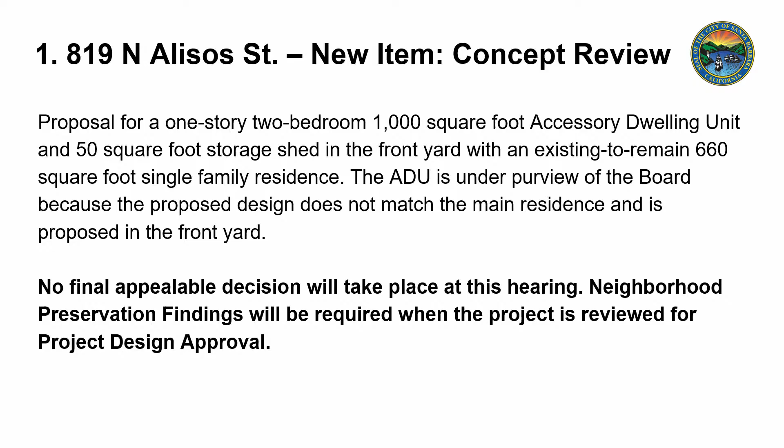Our first item is a new item for concept review, 819 North Alisos Street. Proposal for a one-story, two-bedroom, 1,000 square foot ADU and a 50 square foot storage shed in the front yard, with an existing 660 square foot single-family residence to remain. The ADU is under purview of the board because the proposed design does not match the main residence and is proposed in the front yard. No final appealable decision today, so welcome.

Do we have any staff comments? Yes, just one. This project has gone through one round of review through its application completeness cycle. There are some corrections and design changes needed for the project to demonstrate compliance with some of the zoning ordinances, but generally the style or massing doesn't need to be altered too much. So staff thought it best to have it come here for conceptual review, even though it's not deemed complete yet. Any comments on the style or location of the massing would be really helpful - just general, broad comments - so that when they return, hopefully they can be granted project design approval. Thank you. You'll have 15 minutes to present. Great, thank you.

I'm Alex Wyndham, architect on the project, and thanks for reviewing this. So I'll just give you a rundown of the project first.

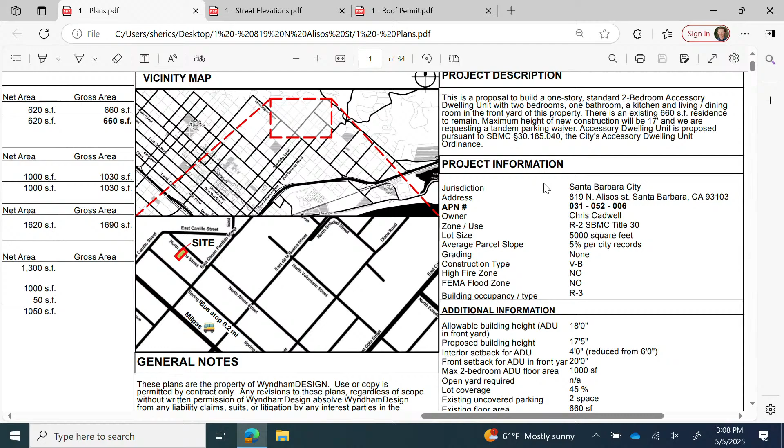And we have the way the lot is, there's a large front yard. The existing house is 660 square feet, and it's set all the way at the back of the property.

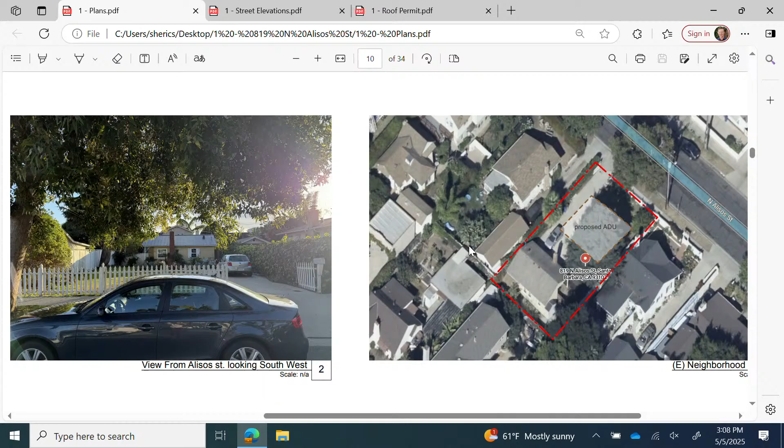The existing house is plaster, probably built in the 40s, 50s or so. It's got a standing seam metal roof, which the owner put on a little bit earlier. So that's the existing site.

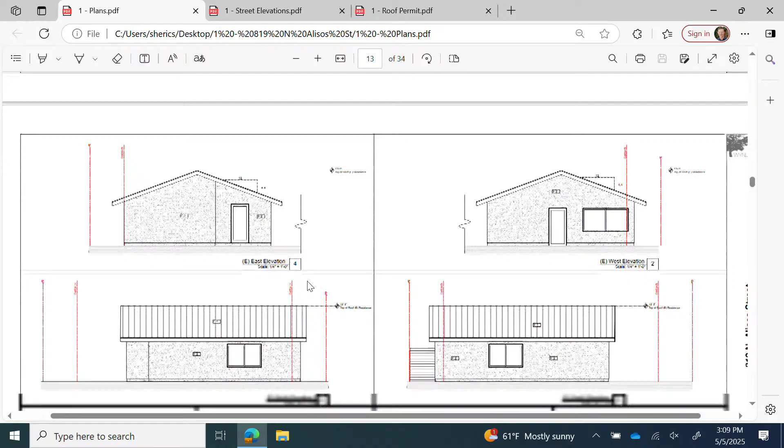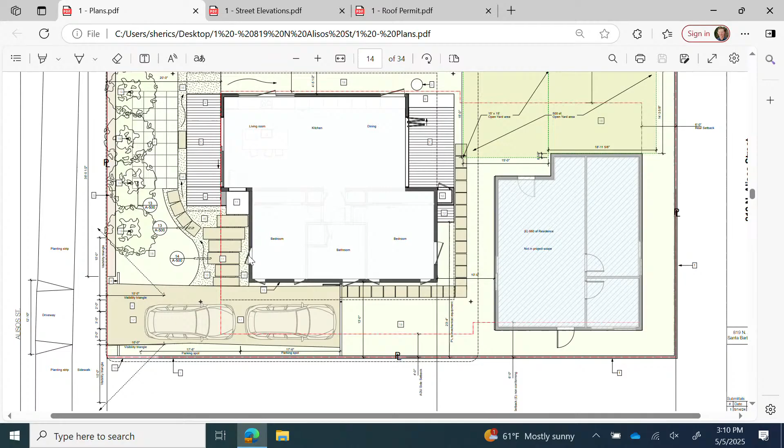So that's a site plan. And here's our floor plan. These ADUs are so small, so...

The main living area we combined it all together. So the living, dining, and kitchen area is one big room with a raised ceiling and doors on each end, so it opens out to the outside. Even though it's a small space, it really connects to the outdoors and lets the owners use the back porch and the front porch as part of the living area.

And then the lower part of the building is over here, which has the bedrooms and the bathroom, and a little storage spine down the middle.

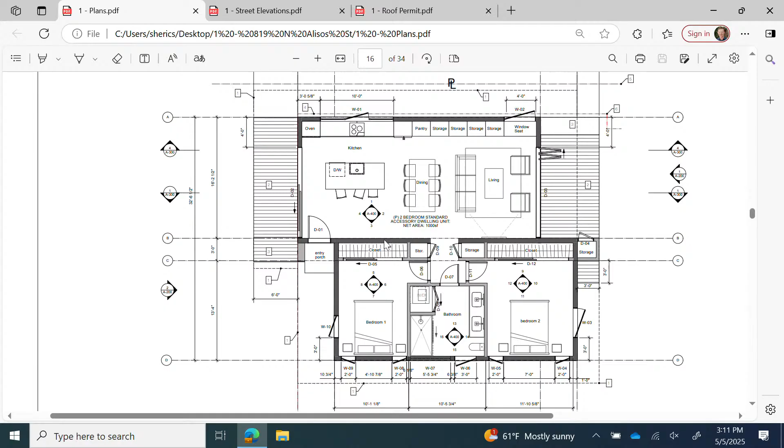So the taller portion is going to be a plaster, like a smooth plaster in a light color. The lower portion, we're proposing to do a shiplapped cedar siding, with a standing seam metal roof as well, and metal-clad wood windows.

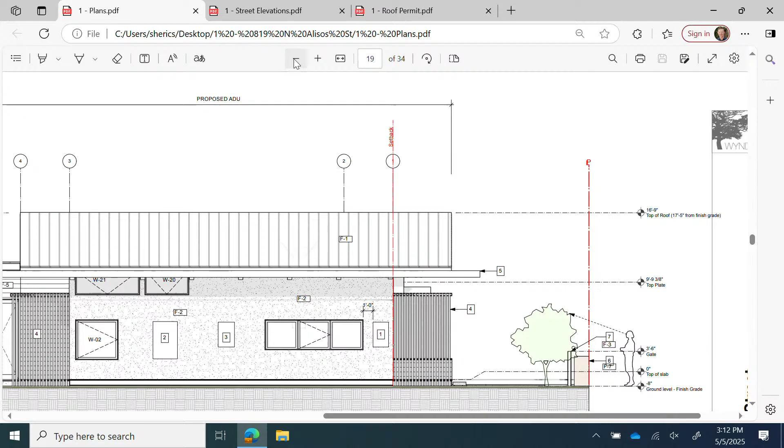So there are my elevations. This is a little bit of a comparison between the two. The existing is on the right and the proposed on the left, with a couple of renderings at the bottom.

And then we have the exterior cedar, which we're looking to do as a shou sugi ban, the charred cedar.

For the front yard, we're looking to do a dry stack Santa Barbara sandstone wall with sandstone pavers and native plantings and the rain garden as well. There's some exterior lighting, which will be dark sky safe, downward facing, and no glare.

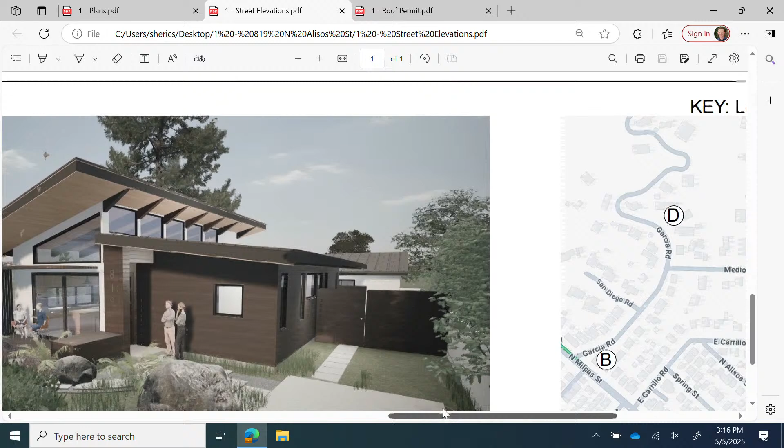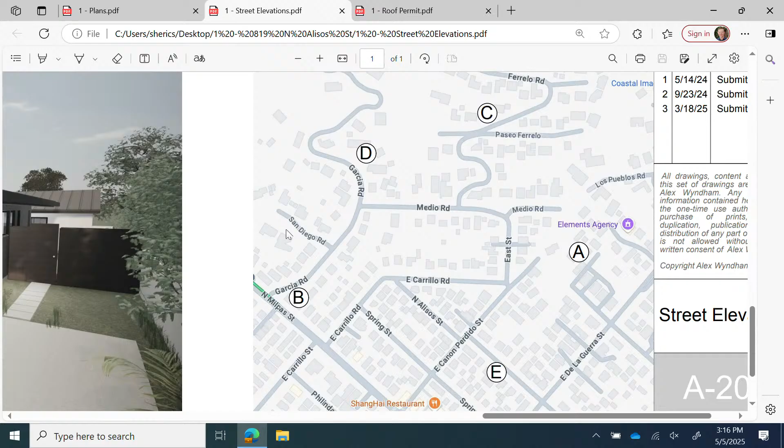I also drove around and looked at other buildings of a similar style to what we're proposing. So E here is 819 Alisos, the project site, and then A, B, C, and D are around here—they're all pretty close, within a few blocks, a couple blocks.

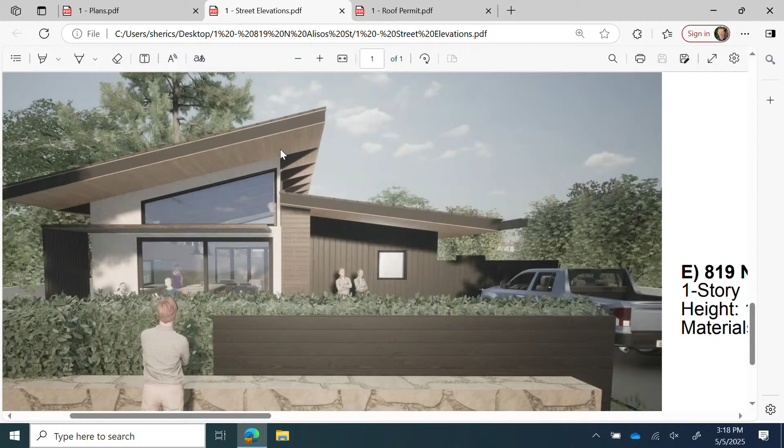So what we're proposing is the larger space has the plaster, the shorter side has the wood cladding. We've got larger eaves to provide shading and give some character to the building. They're a little too long—one of the comments was we need to make them a bit shorter. But that's about where we are right now in the design, so I'd love to get comments about bulk, scale, and style.

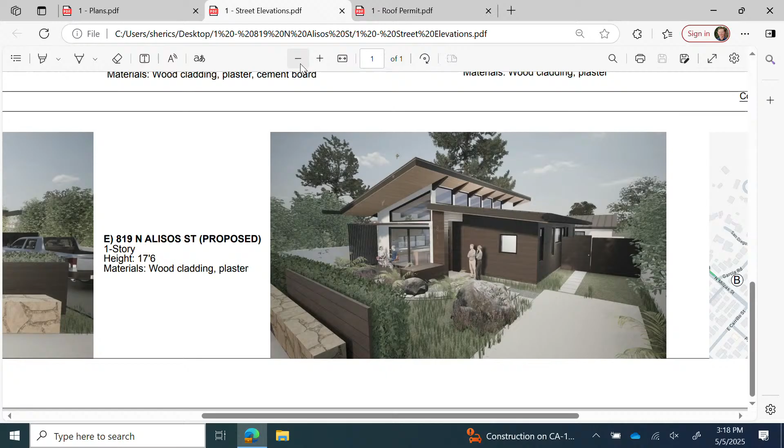Perfect. We'll move to public comment then.

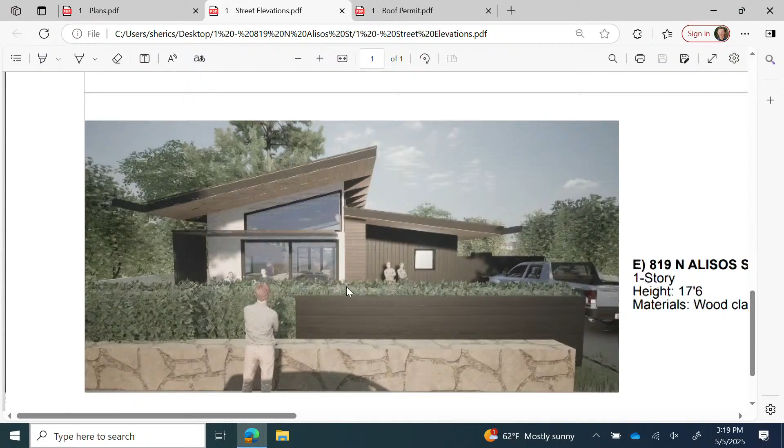On the render we're looking at, all the wood claddings are horizontal, but on the elevations some are vertical, some are horizontal—just wanted to clarify which is the end result. So some are vertical and some are horizontal, and you can see the thought behind that in this rendering. Okay, I was looking at the cover sheet render. In this one, there's the spine that runs through the middle, and that one has horizontal cladding, while the bedrooms and the bathroom are vertical. Thank you.

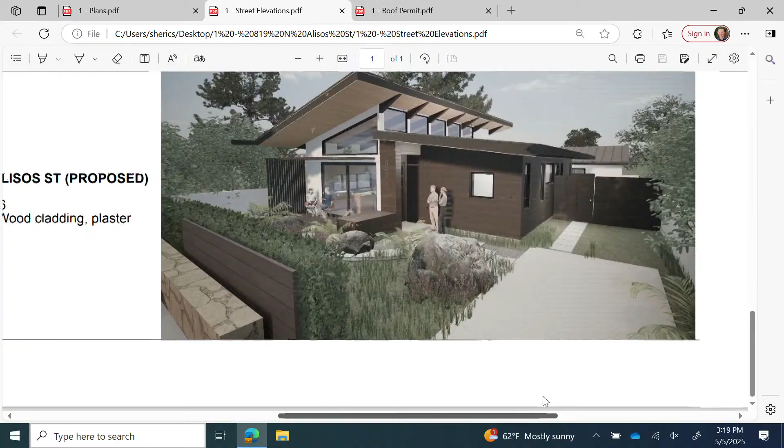You can see it a bit more in this rendering. Okay, can you show us on the site plan? There's the existing tree, I believe it's a 24-inch diameter. It will be on one side, I'm not sure if it's east or west, close to the proposed building.

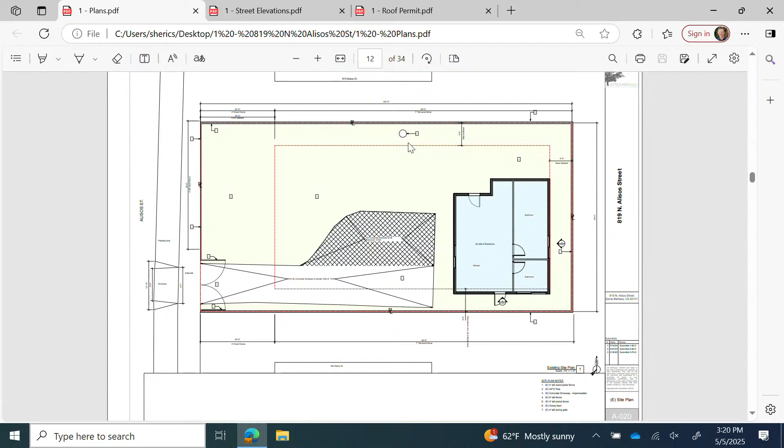I think you have this one, keynoted as number 2, that round one here. Yes, so that's an existing tree. I'm not sure of the species, maybe a type of cypress. And right now we're proposing to remove it.

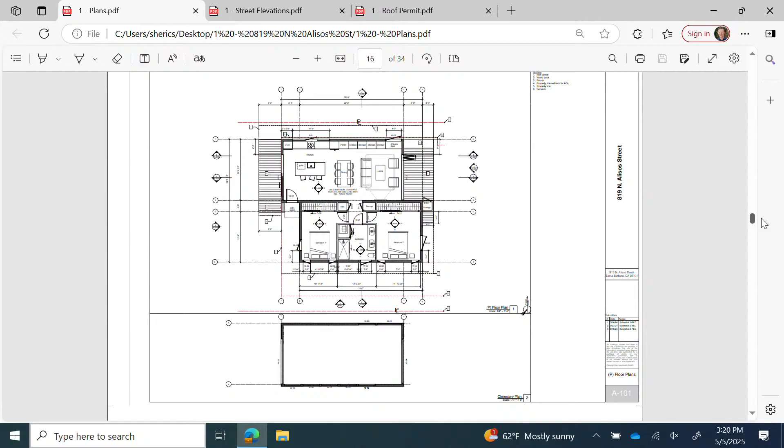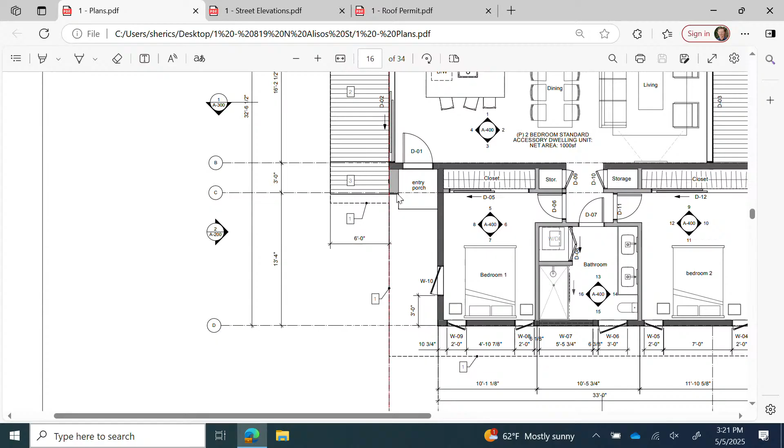Yeah, so that is actually, which we're going to remove. That was right here, there was a little shed, kind of protruded out, and it was a storage area. So we've pulled that back, and we don't have that anymore. Got it, thank you.

And just to confirm, your intent is to paint the existing residence the same stucco color as the proposed ADU. Yeah, exactly. And can you go over, I know it's a shade of white, have you thought about what color? We haven't gotten the exact color yet, but it would be a light, lightish white.

And then last thing, I saw in the rendering, can you speak to it looks like there's part of a fence or wall behind the sandstone wall with horizontal woods. Yeah, so in this proposal we had a sliding gate that would slide across the driveway. I think we're going to remove that because it's right on the sidewalk, so we'll probably just not have a gate there.

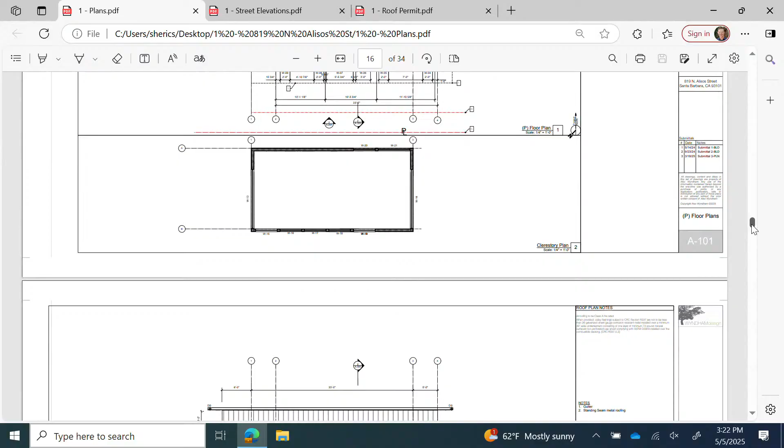Okay, that's it for me. Thanks. Any other questions? One question is the height again, the plate height on the lower level, because it looked like you were drawing your plate height lower than the wall, maybe. If you could just zoom in on the elevation that has the plate heights on it. The south elevation might be good.

So I've got a 9-foot plate on the lower side here. And then there was another drawing, maybe it was the south elevation drawing, that was throwing me off. Let's see the other long elevations. Oh, the long elevations, yeah, let's see this one.

Is this the one you're looking at? Because the plate height looked lower. Yeah, you might be right there. Let's see, where is that connecting? You see what I mean, because they're slightly different between your left and right side, they have different plate heights. This one I think may need to be a little bit higher.

I think you're correct, that was what was throwing me off, where your cursor is. So is that correct, you're going to raise it up to above 9.3, 9? Yes, so the lower level plate is actually going to be at, let's see, what's that number?

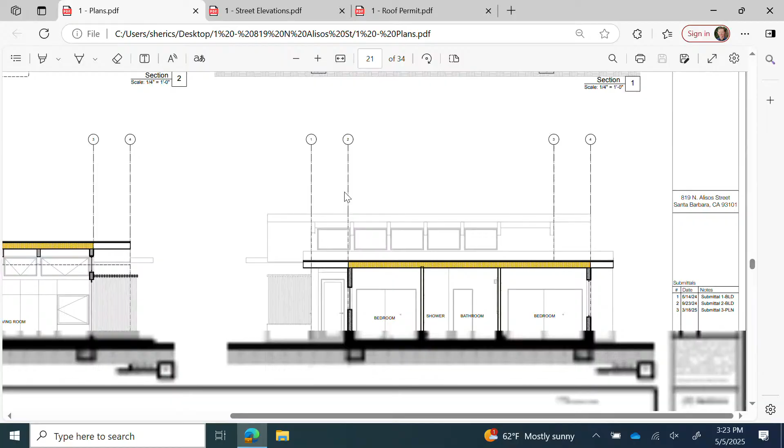So on this section you might be able to see it a little better. On the wood side it'll be 9, and then on the plaster side, like this. So in the section you can see, I actually have it here. Yeah, so that elevation is incorrect on that other drawing. That's what I thought. It should be 11, 11 and a half on the north.

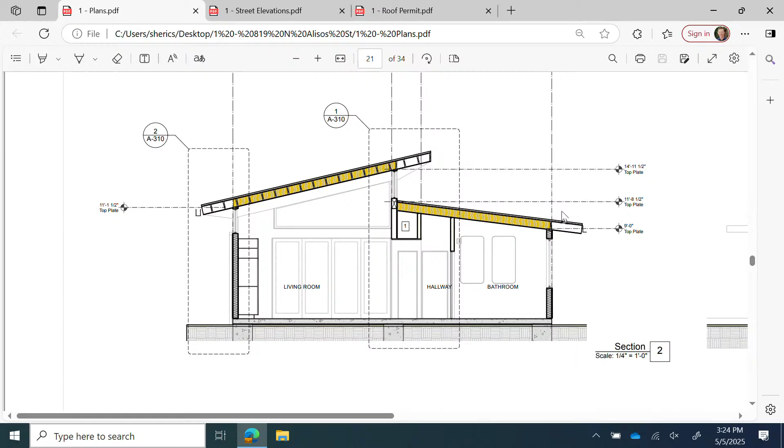I'm kind of calling the street west, but you're saying the street is not west. The street is kind of northish, northeastish. So if I'm looking at this elevation and that's the street, what elevation are you calling it? That is east. So okay, the north elevation you're showing 9, but if you go to the actual north elevation, let's see, let's go there.

Here's our north, that's our south. I think the site plan shows the north arrow different than the elevation. I'm just trying to look at the driveway elevation, because that's the elevation that I think you said had a 9-foot plate, and then the other side, across from the driveway, had an 11-foot plate or so. But the driveway elevation, what's that plate height?

So this is the view if you're standing on the sidewalk looking at the building. This says it's got a 9-foot plate on the right-hand side, by the driveway. So can we go to that elevation, which would be the east elevation? Yes. So if we're going here, that is this elevation here on the bottom.

I'm having a hard time understanding this. I think the labels are wrong, correct? Yes. So on this elevation, it should be about 9 feet. That should be 9 feet. Is that it, or is that another drawing? It doesn't say elevation on that drawing. It says the west elevation. Oh, there it is. So that's supposed to be 9. Yep, so this is 9 feet.

Then you were not asking for a minor zoning exception for the height of the hedge at the front. You're going to keep it at 42? Yeah, we're going to keep it at 42. You don't want to make it higher, for more privacy? No. Okay, no more questions.

Board Member Richards: Is there any landscaping proposed in the front yard? Yeah, so we're proposing to do some manzanita trees in the front, and then doing the rain garden. We don't have a landscape plan yet, but that's the idea of what we're looking for.

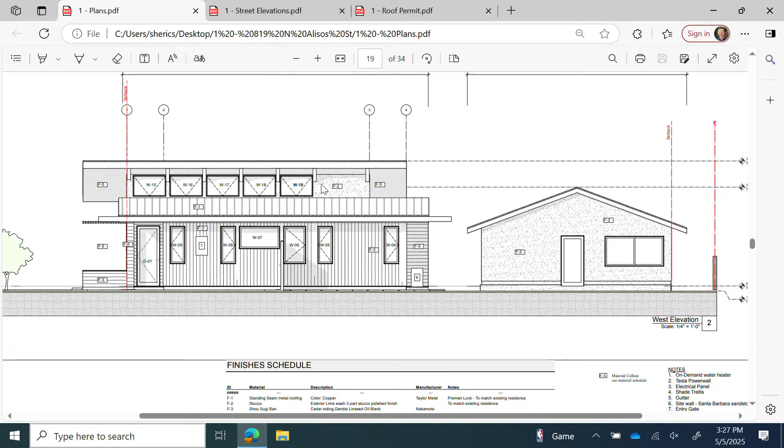I guess the other question I had is, what's the rhythm kind of based on for these exposed beams? Because it seems like it changes partway through. It does change partway through, and it's partly to have a consistent length to fit in the site and get our square footages right. It is basically to keep our window widths consistent across here, and then this ends up being a shear wall there. So we wanted to keep the window widths the same, and where the shear wall is, that had to be a little bit wider, so we're able to have the beams a little bit further apart.

And then, what's the plaster texture finish for the existing main residence? Yeah, so we're thinking of doing a smooth finish to match.

And then my last question is, if we go to the opposite elevation, the east elevation, the head height for these low windows, what is that? Right now those are at... I think it's 6 feet at the top. And right opposite those, on the property line, there's a plaster wall that's 7.5 feet tall or so between us and the neighbor, so those would all be looking out right onto that wall.

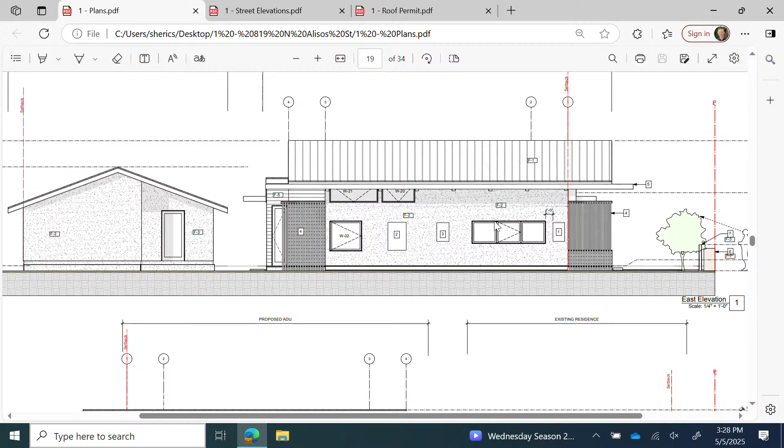I think that's all my questions. Okay, all right. You had mentioned potentially adjusting the overhang at the front yard.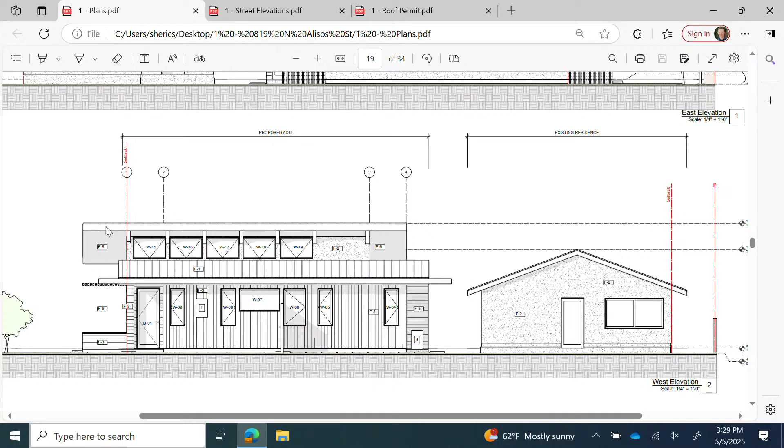So what is it right now, and what are you thinking about adjusting it to? Right now it's a 5-foot overhang here, and we're thinking of pulling it back. I think they're saying to bring it down to 2 or 3 feet max. So it would come to about there instead, because it's over the setback line. So that's about what you have as it wraps around? It is. That would be 3 feet all the way around.

Okay, we'll move to comments.

I actually have one more question. I'm just looking at the street view with that cypress tree you mentioned. Are you planning on replacing it, or thinking about other types of vegetation or screening along that fence line? Looking from the street, it's like a very mature buffer between the properties. It is, yeah, it's a large tree. At the moment we're not planning to - the owner's kind of worried about fire danger and the tree falling on the house.

But yeah, we'd be open to suggestions. It's interesting because it's quite high. I don't know how much it actually would screen, the foliage is so... I'm not even thinking for screening, I'm just thinking once that's gone, what other mature planting is there, kind of how it's aesthetically affecting that street, and looking around in the areas where you don't have it.

I mean, I understand why you'd want to remove it, but just... Is that palm tree on your property or your neighbor's? The one on the right side, opposite - is it on the property? Oh, it's showing up on our Google but not in the photo, so maybe it's already gone.

Yeah, and I think that was all my comments. There is one other thing on the side elevation—I saw that on the west and east there are water heaters and a Tesla charger. I know you don't have a landscape plan already, but do you think you'll have enough space to propose a little bit of screening? I know on the right side of the image we have hedges from the neighbor, but on the other side we don't.

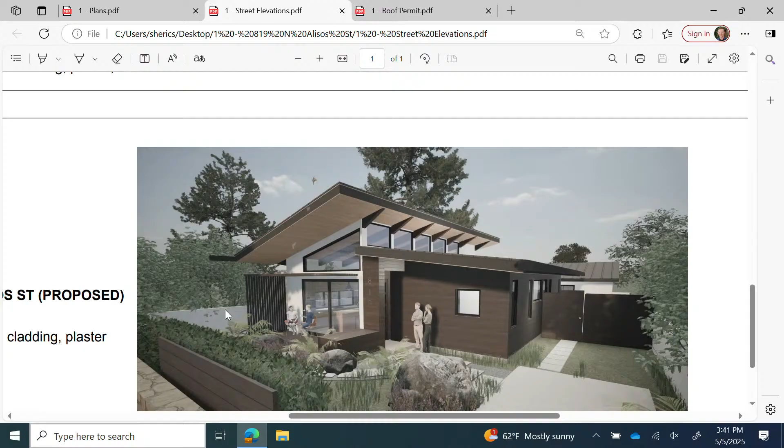On this side, you mean? Yes, on the back. Is there any way we can screen that? Yeah, so as you go along there, right about here on the drawing, it goes to a 7.5-foot wall, and that goes all the way to the back of the property. So as far as screening, it's very well screened. So when you're standing there, you don't see the neighbor's windows? No. I think that's all my comments.

I think it's a really nice project, and it will be a really nice improvement in the neighborhood, and we're excited to see it. Great, thank you. Board Member Richards?

Sure, yeah, I can appreciate the reduction of that front overhang. I think it's going to help bring down the scale of the house so it doesn't feel as looming from the street. I do think having some screening there is going to be important, because it's a straight-shot house with a big picture window to the street, so your clients are going to want some privacy from people walking by. I'd also encourage you to study making the spacing for all of those beams a consistent depth—I think it'll help the space feel uniform and not like there's a weird gap at the end. Yeah, but I think it's a very attractive project and I'm looking forward to seeing it.

Great, thank you. So from the board, do we think this project could go? Sorry, I just wanted to jump in—I know there were some questions about the tree replacement standards from some of the board members. I'm hearing it come up about three times, so I wanted to remind you about the design guidelines and meeting procedures in the yellow book, section 3, for tree and vegetation preservation. There are some standards for replacement that the board can use.

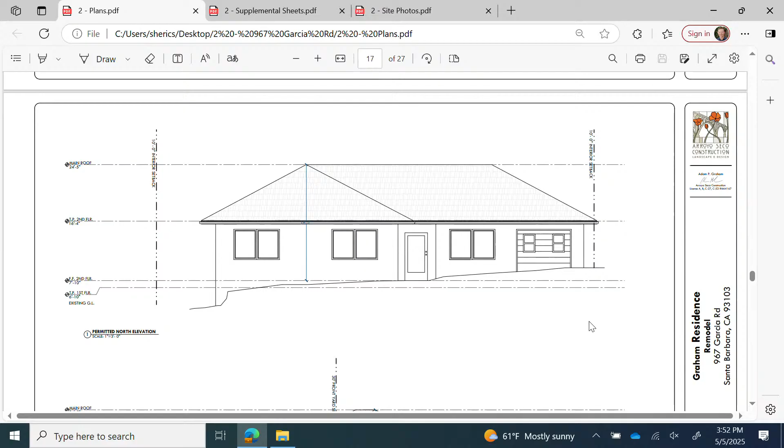Most of the house, as it currently sits, is in its original 1946 state of construction. In-wall electrical, plumbing, and waste lines are all original. The heater is in the original sump, a gravity heater in the middle of the house. So at this point in time, it is far overdue for some upgrading.

The garage was converted the year following the original construction. So if you look at the floor plan, there's a sort of an in-law bedroom and ensuite. At the moment, the garage is basically unusable unless you have a very short and narrow vehicle.

There was a minor remodel addition in 1972, which added the terrace to the back of the living room. There is a dubiously permitted room underneath the terrace, and they did a minor kitchen remodel. That's it for the permit history on the home.

There is an apartment under the house that is a mix of original fixtures, electrical, plumbing, and so on. The bathroom is original, and it was brought in to be doubled in size when the upstairs terrace was permitted. Our intent is to convert that existing space into a special ADU.

You can see the finished stand-up basement storage. That is all unconditioned space, and I would like to capture that within the foundation and add conditioned space in the center section for a wine cellar, storage, whatever.

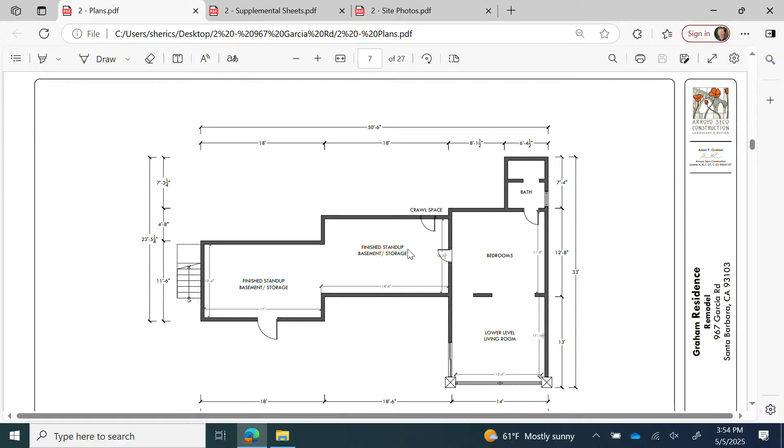The intent is to basically use the existing footprint and in fact reduce it in size on the west elevation, because we need a driveway to get to a garage, since as it is, the existing garage is not code compliant. Personally I don't care about having a garage or not, but since it needs to be code compliant, we're proposing putting the garage towards the bottom of the property with a pool cabana.

Not a spectacular architectural piece of work in that garage. I'm looking at 8-foot plates and probably a flat roof. My original design concept was a green roof, but because of fire zoning, we can't do green roofs on any of the additions, which is unfortunate. Anyway, there's nothing spectacular about the height of those lower buildings—it's just to get the garage in a permitted state.

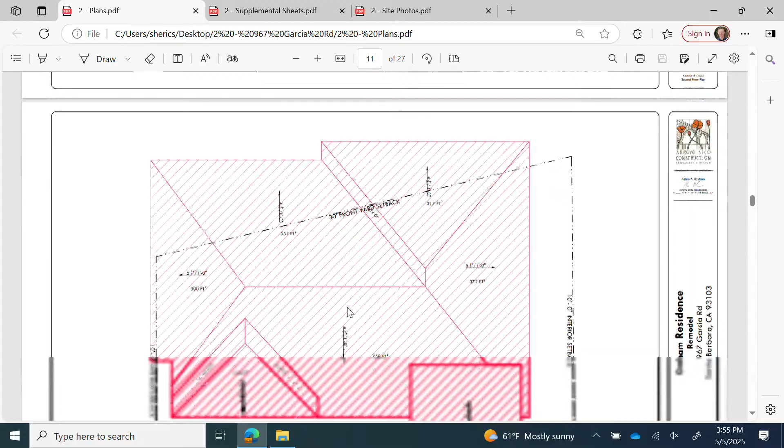We are proposing a fairly major remodel with an addition of a breakfast nook off of the kitchen. There are some nice views at that part of the house, giving a little bit of privacy to that balcony or outdoor terrace off the back of the kitchen.

We'd like to do the conversion of the lower apartment into a special ADU, and upgrade all of the mechanical, plumbing, and electrical systems of the house, and insulate it. The major big-ticket items that the neighborhood would be aware of are the new roof profile and new roof material.

It's very similar to the last project you looked at—a standing seam roof with a light gray cool roof color. We'll have that as part of our presentation, the color board. So, fairly, not a darker brown, but a lighter brown-gray taupe roof.

The addition of the new 20 by 20 garage with a small pool cabana at the bottom of the property.

Finishes—Lisa, go back one. The finishes are off-white plaster, bronze tone cladding to the sashes. I would intend to use a Fleetwood window and door group, and some vertical sandstone. Would you show the front elevation? Just some vertical sandstone panels to offset the plaster a little bit.

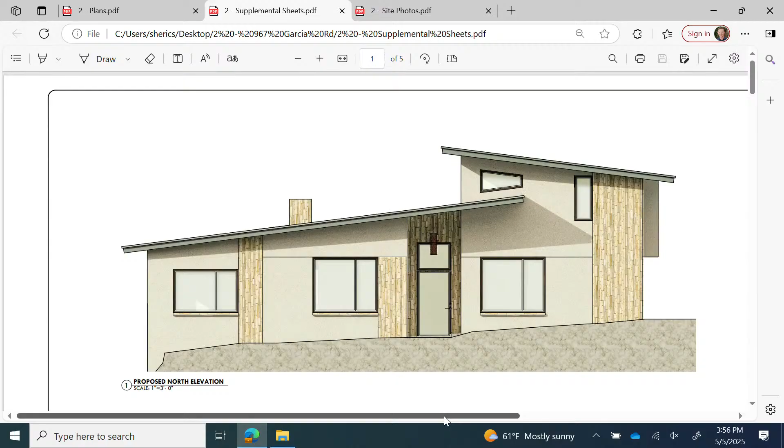The house, we'll get pictures of the house now. The house right now was skim coat stucco just prior to sale, so it's very, very vanilla, not a lot going on stylistically. It's basically a monotone paint scheme, and the picture here does belie a little bit of the over-height roof—it's an actual 8-foot profile from the eave to the ridge.

Looks a little bit to me like an old fast food restaurant, and I would like to eliminate most of that mass. Can we look at—there we go. Do we have one that compares the existing to the proposed? There we go, okay.

So the last bit of the proposed project is to add this street view second story master suite.

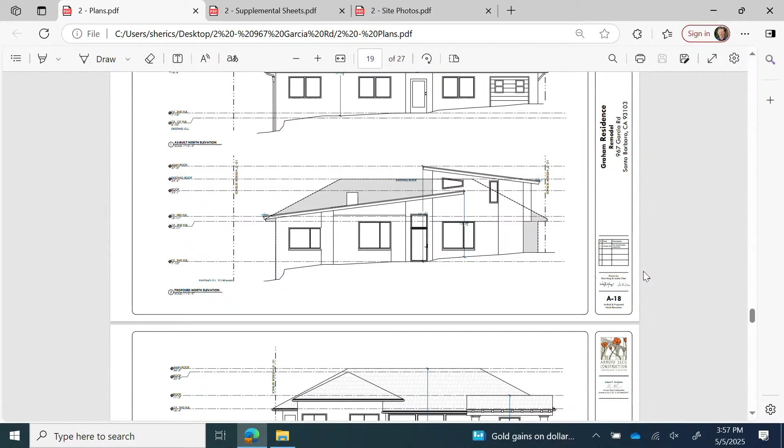The issue we have right now with the house is that the majority of homes on Garcia are about the same distance from the curb to the front of the homes. So depending on how your front yard setback easements are placed on the property, our project has a good chunk of front yard setbacks. Actually, the house is built within it, and you can see the property line and street improvements.

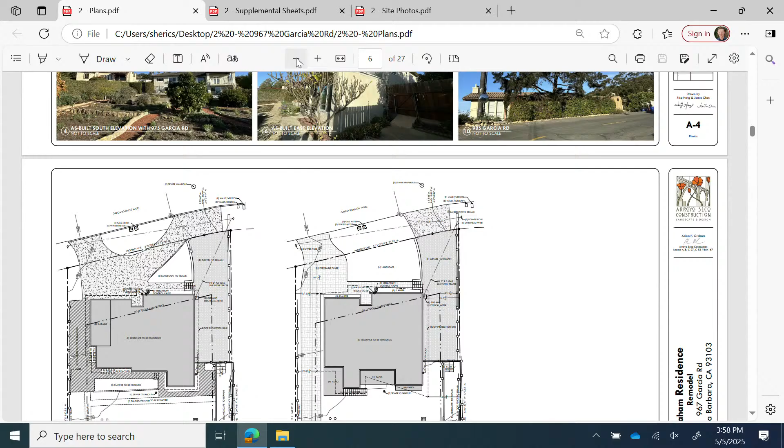There's no sidewalks, there's no off-street parking. Garcia is kind of a unique street in that I wouldn't say it's dangerous, but it doesn't really allow for a lot of pedestrian travel, bicycles, etc., and there's certainly no off-street parking. So this house, unfortunately, in its original position is somewhat handicapped, if you will, by its proximity to the street, which is really no different than the neighboring homes are.

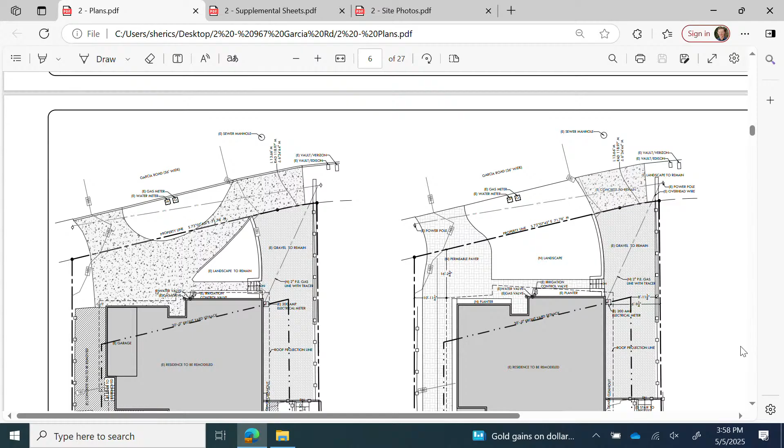I'm calling the residential style maybe a Santa Barbara contemporary. So it's fairly similar to a lot of the other homes in the neighborhood. We did quite an extensive neighborhood survey to just see what was out there as far as second story and style of architecture.

The house at the bottom of Garcia, right on Milpas, is pretty cool, a little bit further than I'd want to go with a modern structure, but when they were building it, I was really quite impressed with the architecture of the 906. Let's go to the next one.

So basically the main floor and the bottom floor rooms would stay the same. The window penetrations, the door locations, the lines of sight, everything that's in the existing house right now, we're not intending to change anything. So regarding neighbor concerns about window and door placement on the main floor, nothing really needs to change. It's all fine as is.

The intent with the second story primary suite was to capture the water views only, and the other windows represent clerestory opportunities to get more natural light into those spaces. But I'm not trying to open up sight lines into neighbors across the street, the neighbor to the east, nor the neighbor to the west.

We are looking literally over the backyard of the neighbor below us and over the house of the neighbor down the street from them. So our views are literally over the roof line of neighbors down the street from us. Again, we're on the south side of the street, but as Garcia winds down, it's quite steep, so I was very sensitive to try not to create privacy issues for me when we're in the house and the neighbor is looking back up at us.

We are up to 80% FAR, but two-thirds of that added square footage is in the conversion of the downstairs basement into habitable space, and the garage and the cabana. So the majority of the reason we're coming up in FAR is to fulfill the required garage, the cabana, and the space underneath the house.

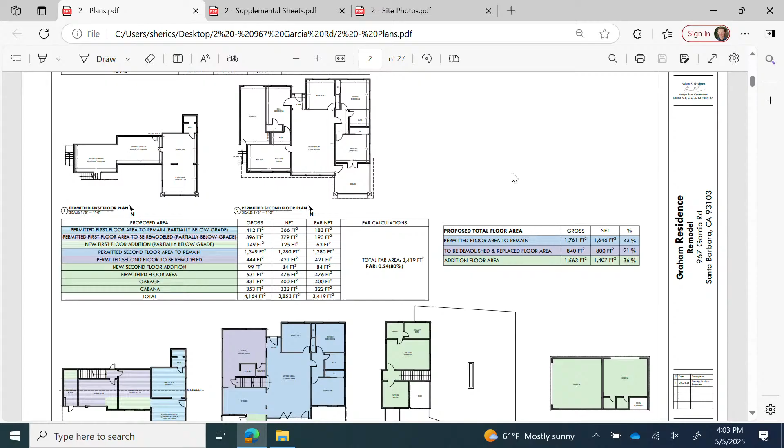Sure. The intent with the roof was really to open up the second story to better views for the neighborhood.

The gray hatched area is the existing roof, so that would all be going away, and there's actually quite a reduction in roof height on that east side. Then you see the second story, or third story from the back of the house addition on the other side, but also a reduction in the floor area on that west side to accommodate the driveway.

The reason we're here is to look at the amount of second story area that would be in the front yard setback, so we'd be pulling a mod. There are two general philosophies with this master suite. You can see the closet and the bathroom exist entirely in the front yard setback.

If the square footage or mass was slid back on the structure, I would be adding to the footprint of the entirety of the house in order to support that, which again is not undoable. But then it begins to shift the mass back to where the uphill neighbor could potentially be impacted in their sight lines to the water.

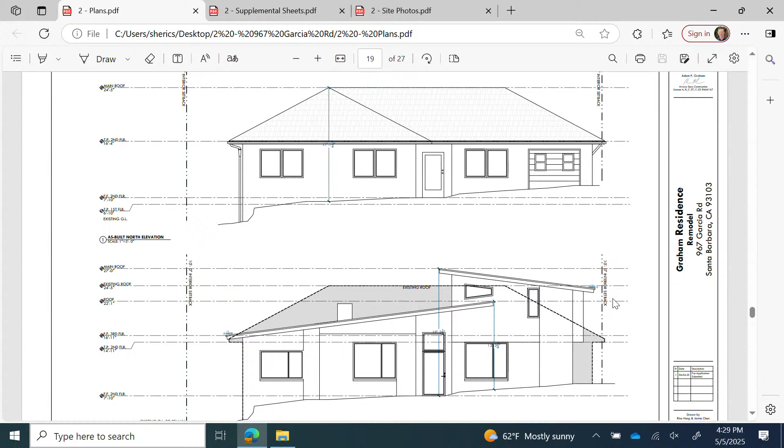When we were talking about encroachment from the street into that setback, can you confirm what the current encroachment is versus if you weren't? Or how many feet into that? Yeah, can you go onto the site plan?

That second story has got it at the back, so there's the cut through right there. It's the entirety of the primary and the closet. What did we say, 7'4" to 11 foot? The longer side is 11 foot, and the shorter side is 7 foot.

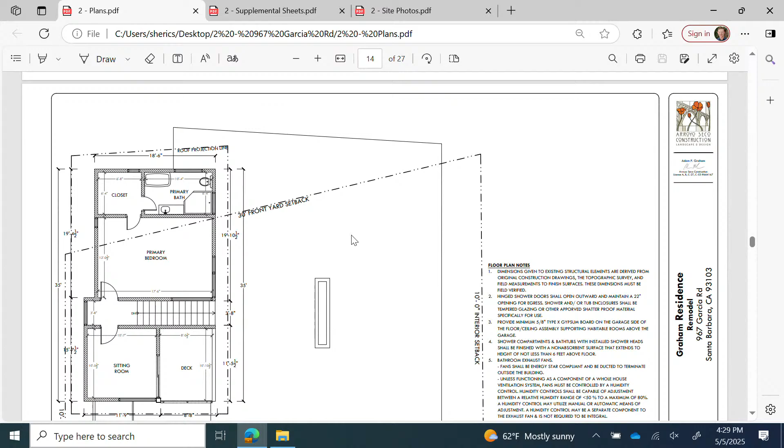Okay, and then part of the existing residence is already existing non-conforming and is similar. Can you scroll up to the other floor plan, the first floor? Yes, that'll help. So that part is existing. Okay, that's helpful.

And then just last question, just thinking about the garage, did you consider siting it anywhere else? Can you just walk me through quickly how you thought about where you put the garage? Well, clearly, we couldn't go in the front yard setback, so I couldn't go in front of the house because it'd be built entirely in the front yard setback.

Okay, so we have basically got the pool permit, and I wanted to be able to have a buffer zone in between the pool and the garage for landscaping, so there was a bit of an actual interior yard space in between the two structures. So we pulled it off the back property line outside of the setback in order to get a landscape buffer.

And, you know, I kind of thought there'd be fruit trees, a lawn, space in between the bocce court and the garage. Okay, thank you for that. That brings me to another question.

For the fruit trees that were mentioned in public comment, I see existing tree to remain. Can you just speak to that? Yeah, I don't intend to. There's one cherimoya tree on the east side of the property line that would be in the middle of the driveway, so that older cherimoya tree would come out. But the macadamia, the citrus, there's a handful of trees on the east side of the property line, but there was no intent.

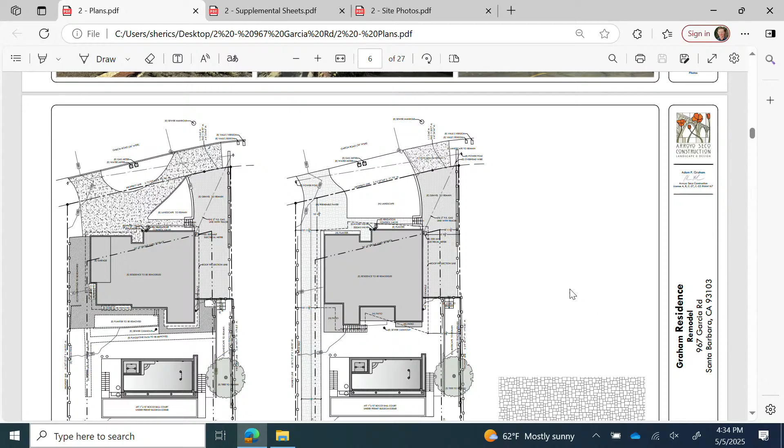In the original home, there's space underneath. Not the original home—now, what's it legally recognized as? I believe half the space is allowable, and the other half they enclosed when they did that second-story terrace. Is that considered storage, or part of the house? It's considered part of the house.

It's considered understory that was illegally converted to habitable space, and you're proposing to convert that into a legal ADU. Though I think it was actually permitted as habitable space—half of it came with the original house. Okay, I understand now. When it comes to the solar ordinance, where is that on your elevation for the north elevation?

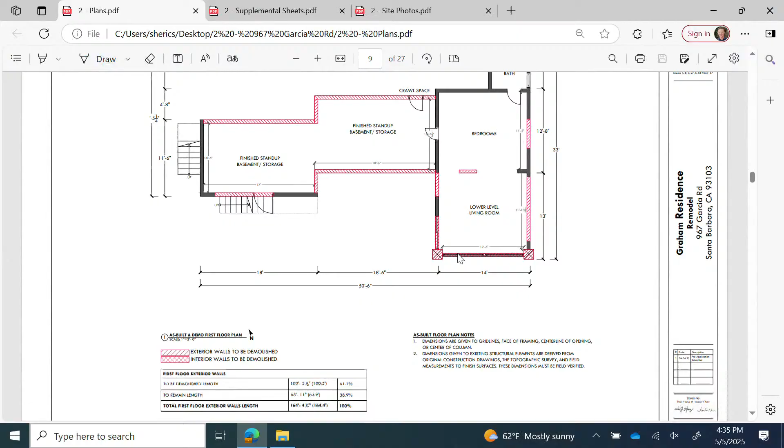Solar study? Yeah, we don't actually have the solar study for that yet. Okay, because we're reviewing something that hasn't had the basics done.

It's because it's a pre-app, so they can come in with whatever they have, right? I thought it had gone through basic zoning already. No, not at all—this hasn't been submitted at all. For pre-apps, our service works such that an applicant can submit just one elevation if they wanted, based very much on design. Okay, I understand. Thank you.

And then, the inspiration for the window—the polygon window above the roofline, the shed roof over the main level—do you have an inspiration for that? Well, I looked at both a rectangular window in that upstairs shower element and this trapezoid shape, and we went back and forth quite a bit. I didn't want to overwhelm you guys with all the iterations.

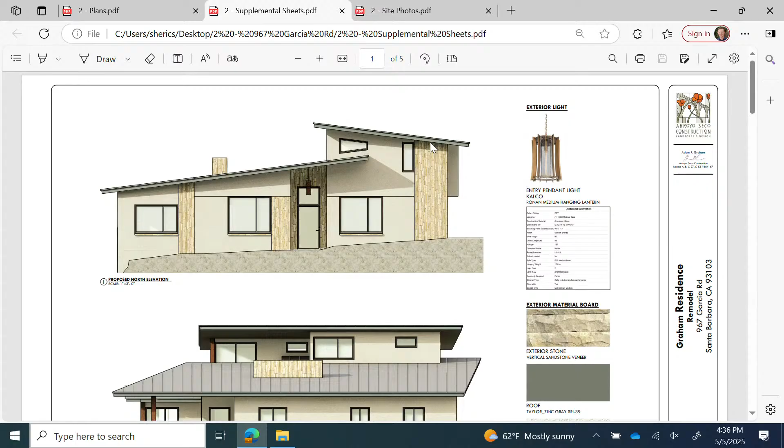I was just wondering what the inspiration was. I'm just following the roofline with the window—it's nothing more than that. Okay, thanks, I think that's it. I think my questions were all answered.

Let's move to comments. We'll start with Board Member Richards. Sure, I think the extent of work going on is going to be substantial—I don't think you're going to be able to get under 50% as currently designed. If you are able to, fantastic, but I think the move of pushing that master bedroom and bathroom out into the front yard setback isn't improving the situation at all. You should potentially study rotating that mass so it sits back behind the front setback and takes advantage of those views a little more.

I'm not a huge fan of that stone finish—I think it's out of place and out of character for the neighborhood. If you're looking to break up the elevation, you could study stepping the walls and stepping the massing, as opposed to just a painted, applied finish.

I think you should also study some of the sections of this building. A section through the stair is going to run into head height issues, based on how I see the floor plans laying out—I'd highly recommend you look into that. And I'd want to see elevations of the cabana and garage; those should match the character of the house and not be a departure, an afterthought, or a throwaway building. So those are my comments.

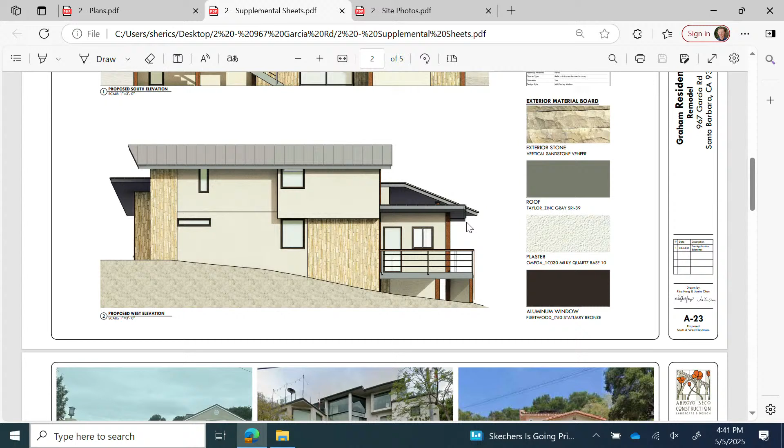And then as an example, the jamb of this window with the window above, they're not aligned. So I feel when looking at the different elevations, some windows are designed more from the interior side and haven't thought through from the exterior. The other example on the west elevation is that window under the geometry that has popped out. I'm seeing the head height of it exactly at the plate height of that. I'm not sure what's happening in the section there. So I think the windows need to be studied more.

One is the relationship of the windows with where the material is transitioning, the head heights, and the relationship of the windows to each other from the exterior side, not just placing them from interior needs. I'm sure that will be part of the progress of the design.

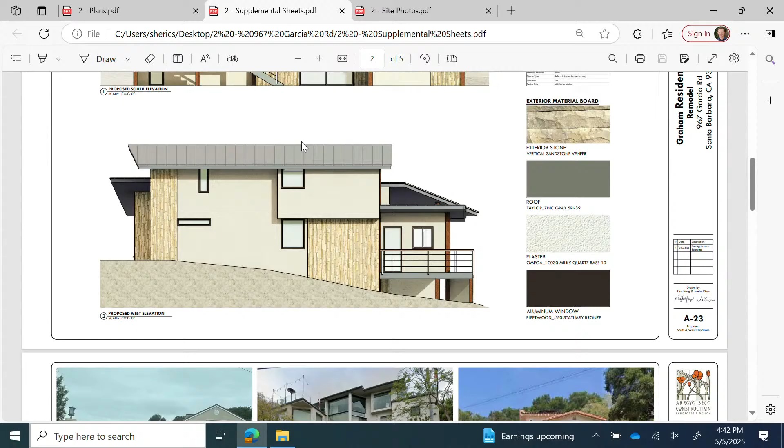The other question I have, if we can see a site plan, which is a common question, I'm seeing that the roof layout, the new proposed roof, kind of has angles. So if you zoom out a little bit so we can see the whole thing. It has angles on the front yard and angled for the backyard, and the plan underneath doesn't relate to that. I was wondering if this angle is just arbitrary or leading from somewhere else.

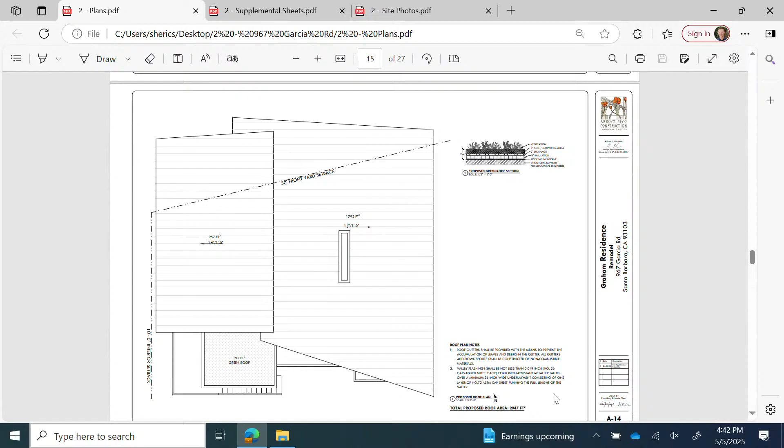It's functional in the back where it overlaps the majority of the outdoor terrace spaces. Can we go to that one? Yes, the one that shows the plan. I was curious what's the relationship of this, like it's covering part, does not cover the other. Is there any specific reason for that angle and positioning of the roof layout?

It was a preferred design strategy. I think it makes the light in the house interesting. There's a lot of different movement of the sun, and I think having just boring right angles lining up with the exterior of the house might not do it.

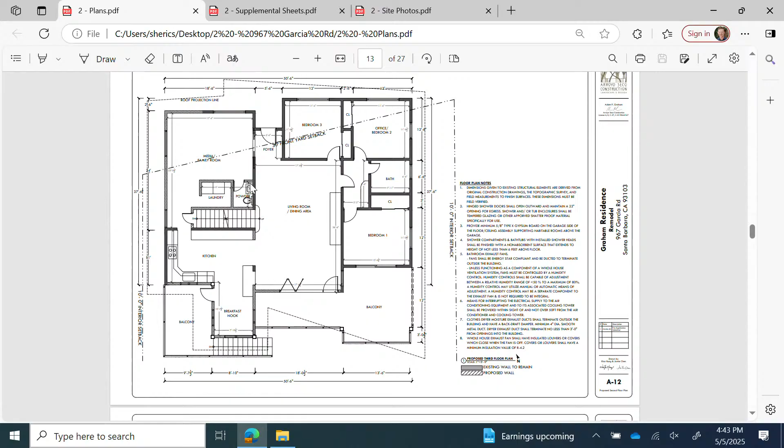The reason I'm bringing this up is I'm wondering if that sharp angle, when you're standing in the neighbor's property, with the head height or the height of that point being the highest point of the roof—it would actually be the lowest point. How would it be affecting things if it was aligned with a balcony or another angle, would that help any views in the neighborhood or not? I wouldn't think it would affect any of the neighbors' views.

I think that was all my comments for now, and I'd like to hear from others. Okay, great. I know, sorry, a lot of comments, so I don't want to keep saying the same things. I agree with a lot of what's been said, but I'm excited for the potential of this project.

I would agree with the applicants that what's currently there is definitely not the most charming house on the block, so there's a lot that you could do with that. I think you could make a more contemporary home work, but I agree with my other board members that considering the way you're doing the masonry and the palette, I even had a question about the plaster finish. I don't know if that was what you were proposing or not.

And I know this is really early on, but some of those charm-giving elements, I think you could study more. One question I'd have is, because you've done styles of homes like this in the past, I think it would be helpful to have photos of those moving forward, especially if you're sticking with a similar design, just so we can see outside of a rendering how that stonework, palette, or roof lines look. So that would be one ask from me.

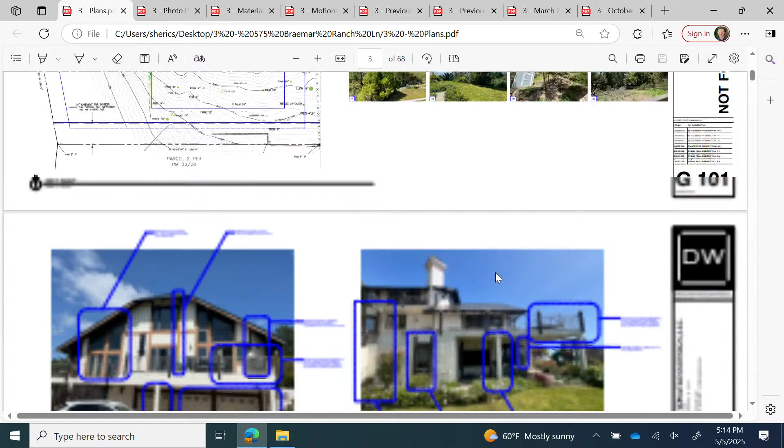I think I touched on this already - these were kind of the intent of the comments. One thing we did from the last iteration to this one, you saw already with the photos, and I can touch on those if you have questions. I added this to help break it down more succinctly with photos, big ticket items - like we're taking off the trim here in all these instances, so we can see that trim, not the timber, is actually being removed because of rot.

The detailing elements we're trying to fix on this perimeter because it was just done in plaster and not trimmed out. On this north elevation, we're keeping the window sizing exactly as is - just replacing the windows like-for-like with different mullion patterns. On the east, we're just taking off the trim here; we're not affecting this in any way. We're taking off the trim around these windows, replacing them, and adjusting this bay element here.

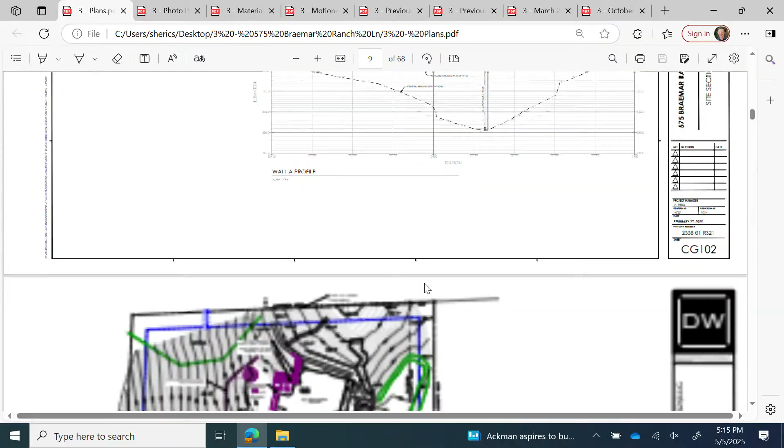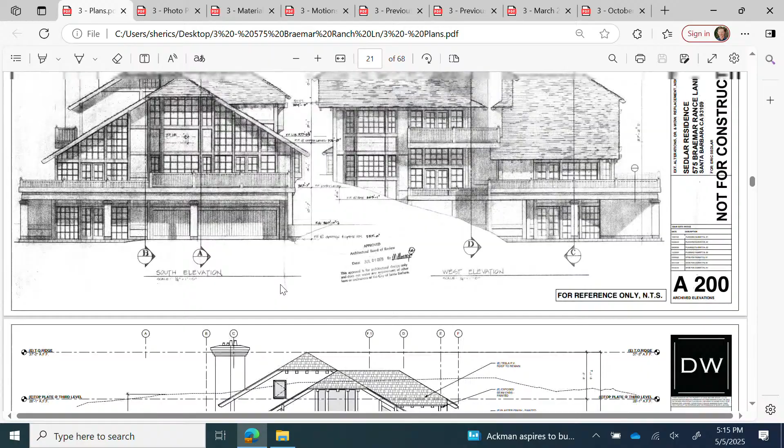On the proposed south elevation, and on the west, we adjusted that guardrail deck so it resembles more, I think, the original intent of the project that never got built out. We like the columns - originally we were trying to mimic these thicker columns that were supposed to be built out that way and carry them up so they could act as breakups for this railing system that never got built, but we're going to stop them short now. This is all as-built here.

So this is originally how the house was supposed to be built. Pretty similar on this elevation, corbels and everything are all consistent. It's the south elevation where it got messy.

One of the last comments too was about glazing, that you felt the glazing was too much. We did a calculation, so what was permitted was supposed to be 75% of the south wall's glazing. What was built was about 50%, and then our new proposed glazing is coming in at 60% glazing, so we're a reduction of what was actually permitted.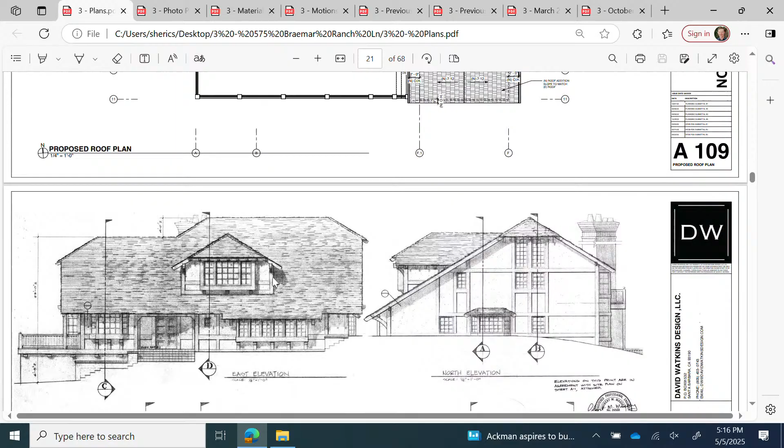Glazing over here is exactly how it was, so there's no change in that on the west. No change on the east, except for this bay window element here where the glass is going to be a little taller. We have about 1 minute left.

Would you mind focusing on the south elevation? And then here's the railing system that we altered, so we stopped the columns short. There's the as-built. And then here's the proposed.

So we're going to build out this trim along the perimeter here with a 2x12 and 2x8. These will be 8 by 8 posts, spread out. There'll be fiber cement with wood caps.

Did you want us to go back to the other? This is the one. No, this is the south. Okay, yeah. So this is one alteration that we did the most changes on from the last time, so that is more consistent with what was there before.

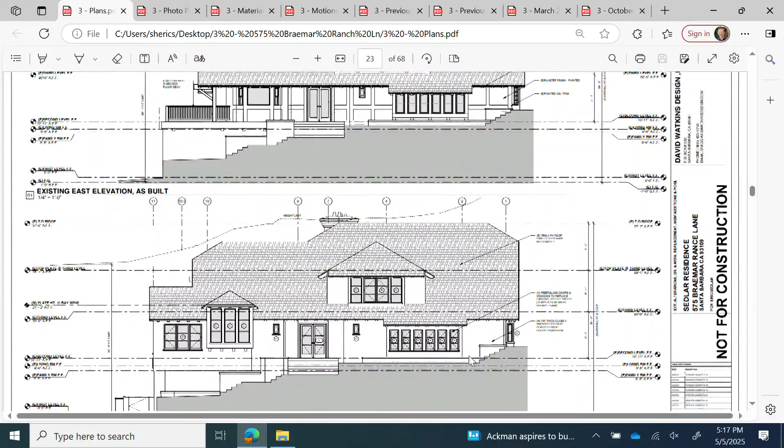It is tricky because it's a split level, so we pulled this landing back and pulled it tighter to the kitchen here, and then kept this more horizontal to kind of mimic that. And so that is the biggest element of change that we did last time was here.

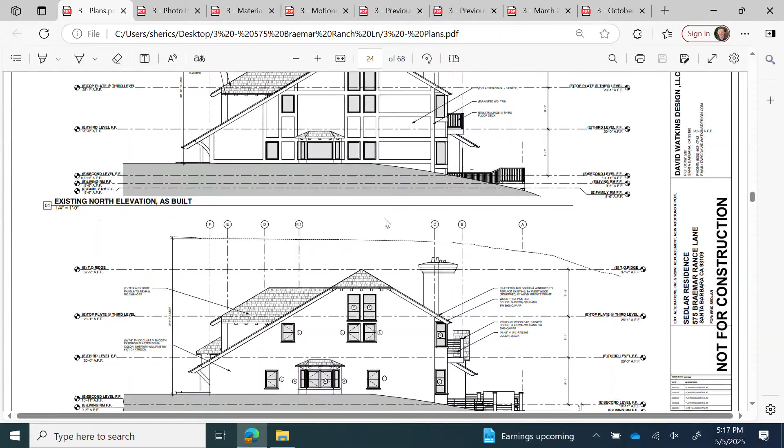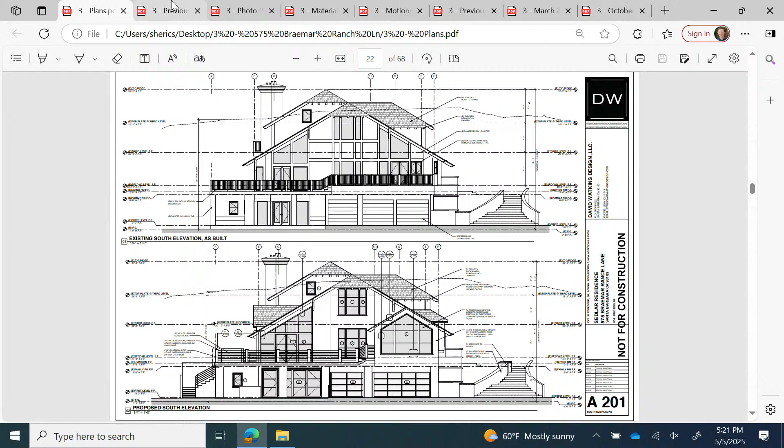Board Member Sherry, if you want to look at my screen, this is the proposed, and on his screen he has the previous. Stay on that one, please. I'll call out some of the other things I noticed you did to enhance this elevation, which was to create more consistent divisions of the mullions. What we looked at previously, each window bay had its own arrangement, but now on the proposed there's a consistent rhythm of having a center panel for each window and a somewhat consistent height division. Is that correct? Yes, I forgot, on the south, on the living room, south and west elevation as well, the new pop out. Got it.

Okay, and then we also adjusted the window glazing at window D, which is at the kitchen, with that patterning. We pushed those vertical mullions out a little bit to help balance it out. Okay, sorry, back to questions if there are any. It's okay, that's it, thank you.

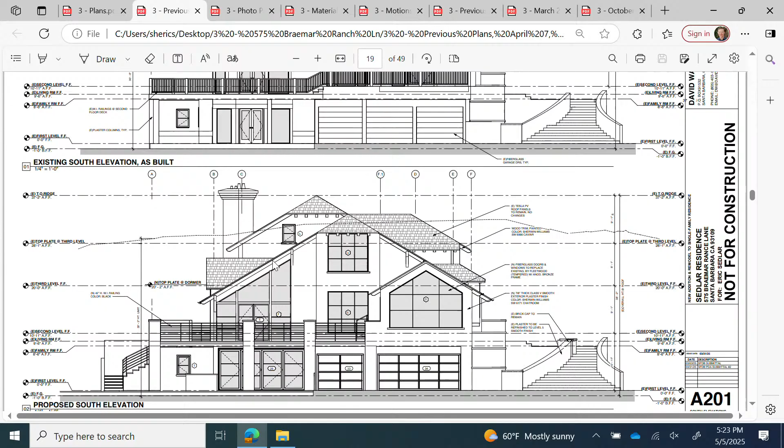So if you will go to your proposed south elevation and zoom in, above the door on the left side you have kind of a thicker mullion above. And then your vertical ones, it looks like on your two side windows those might match in profile, but your middle ones are a different profile, is that correct?

Right. These verticals are like 2 5/8 thicker to help read that breakup a little more. And we also did that on these windows too, because that was the existing window style on those two south windows. They resembled more like a 3-panel system, even though it was one window unit with a thicker vertical breakup. So I tried to mimic that here between the doors and the side lights, and also on that west elevation. It didn't look great with a thinner mullion going vertical right there, so we added that vertical, and that seems to work better. Then we added thinner horizontal mullions coming across with that patterning.

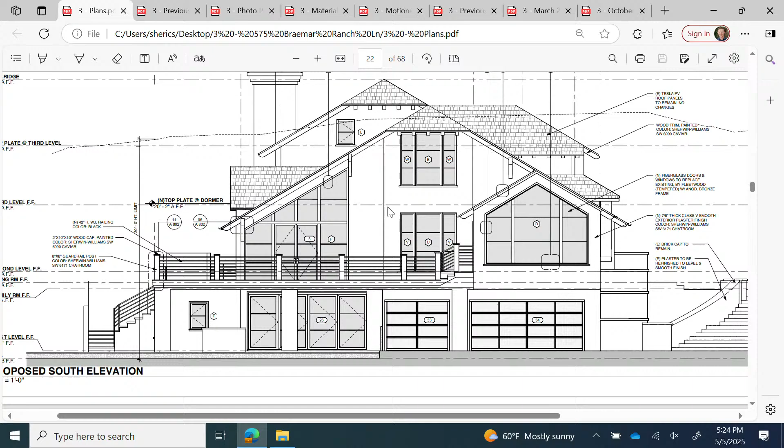No, I'll save it. Okay, I had one more question I forgot to ask. You mentioned when talking about the sketch, the old sketch, that it was the original as-built. What did you mean by that?

The house, I don't know if I showed a plan. The house was supposed to be built, I'll go to A200 actually. There you go, you were talking about that and said this is the original as-built. Original permitted, sorry. No, you said original as-built. He meant permitted. Yeah, original permitted, okay, but was it ever built this way?

No, but the way it looks out there, I don't think there was ever two sequences. I think they just built it all at once. And this projection here, the bay window, they came out to this southernmost wall line. I just needed my memory refreshed, thank you.

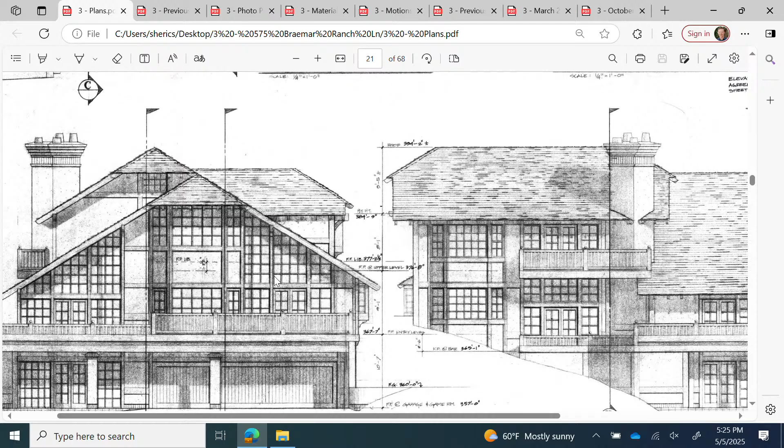Okay, any other questions? Do you have a detail of that wrought iron railing that's wrapping? Sure, this is proposed.

Here we go, this is the railing, the metal itself, the profile. So a thicker top bar and bottom bar, and then thinner ones in the intermediates, and then like a 1-inch top and 1-inch bottom. And then here's a profile of a section cut, basically, of that edge condition. I'll go in right here.

So this is kind of mimicking what was supposed to be built out originally, where they had a trim board built out. They had a curb. It was taller, though, and they mitigated that change in plane by making it look like it was a bench, and then the trim was set at a higher proportion. So that made it look like there was only one level that was just really thick, versus the split levels that end up getting built out.

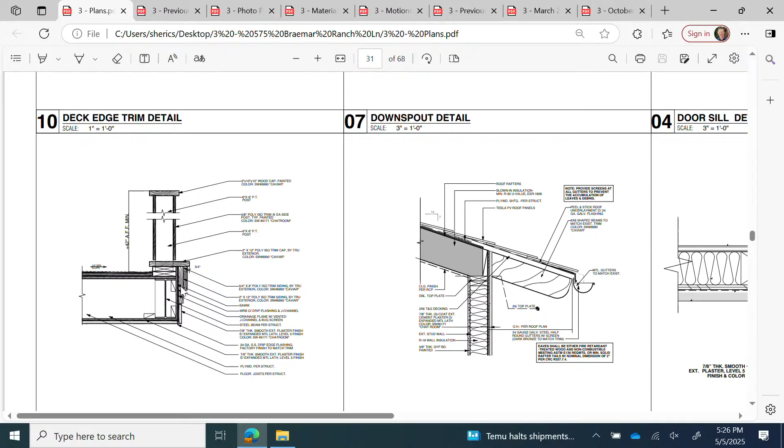So we're going to build this up with the curb here, get the trim back along the facade, and then there'll be a post. We were trying to avoid wood a lot, so it'll be pressure treated and wrapped with a poly ash, so it holds up for the wet climate over there. And then a wood top cap that'll be painted to match the trim.

Okay, any other questions before we move to comments? No, okay. For comments, I'd like the board to focus on either reasons to deny, or if approved, anything that you would want to see approved with conditions.

I think that it doesn't make sense to keep continuing the project, so I think it makes sense to lean one way or the other, unless you feel strongly about continuing the project, in which case I'd like to hear. To the applicant, I really appreciate going back through the site photos.

I think it's really helpful context to remind us that it's mostly screened. And while there's a big part of the board that's focused on views from the public up into these hillsides and Rivieras, it's also taking into account the distance from there and how much can you actually see. One of our concerns before was the amount of large glazing at a distance, and I think you've shown other residences that have that large scale.

I appreciate all the efforts that went into studying all the windows, all the iterations, breaking it up. I still, when I look at this, which was never built, I see a hierarchy of patterns which starts with the grids, which is all over the different facades. It's the main character of the house. And then all the other details are vertical, starting from the railing, the garage door...

and even the detail at the chimney, whatever is the detail below that. And then the only pattern we're seeing in this sketch is the roof, which has the horizontality of the geometry. So there was an original design intention of grid, vertical lines, and the big roof.

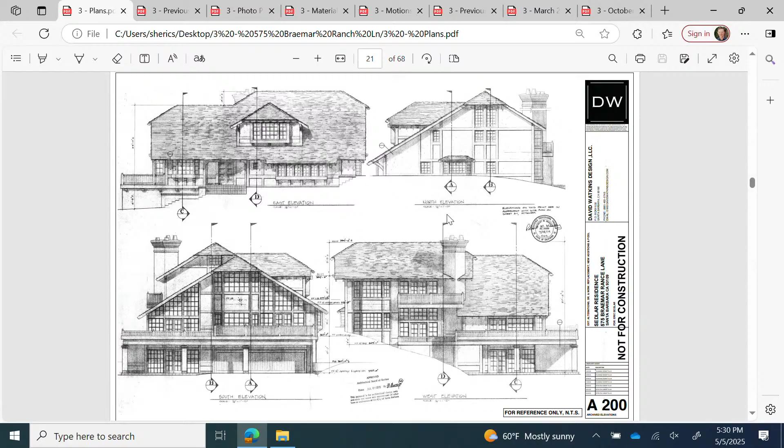And I think you got really close. I know there's no inspiration images that we're looking at of the style of architecture, but you got closer with the breakup of the windows and the proportions. But I think there are a couple of items. One is the railing, which I feel doesn't match the style of the house now—the horizontal metal railing. It's more contemporary than the whole house.

It still looks like a big cottage chateau kind of style. So I think it feels like it's built in another era if we add that metal, more contemporary railing. And the garage door still feels like the house is there and we just added a garage door to it. All of these comments don't affect the context views that we're seeing from the streets, but as a board, we want a more consistent style, so that's why I brought it up.

Wasn't sure, again, what you wanted us to add on to. I would like to know what would be a condition of approval versus a nice-to-have recommendation versus a denial.